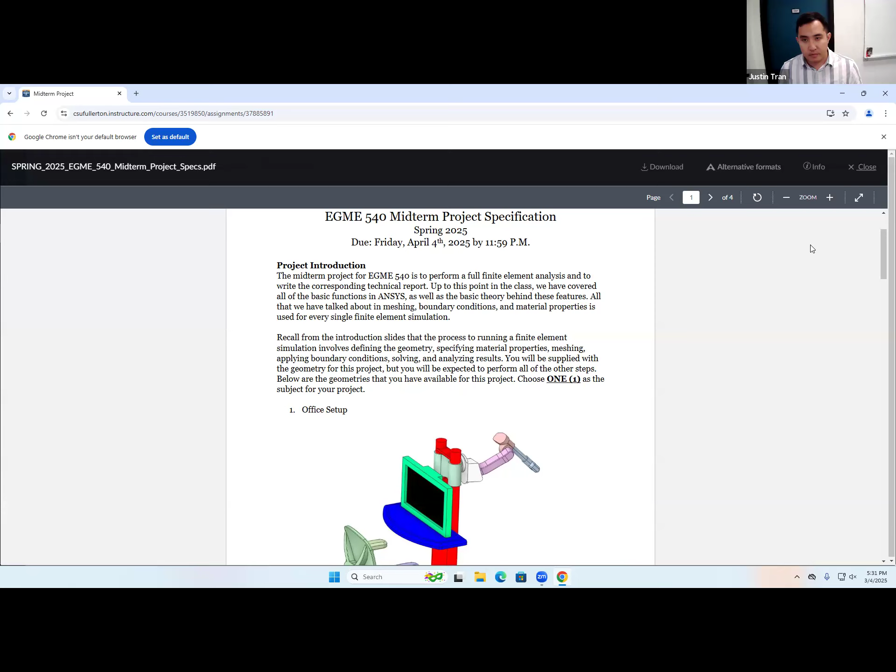So this document is posted on Canvas for you to look at. If you go to the Canvas site, under assignments, there should be a new assignment activated now called midterm project, and we can start to take a look at it. So there are several documents here that I posted for you: there's the project specifications, there's the rubric, which is how I'm going to score the midterm project, and then there's also a template for the project report, as well as the CAD files.

Okay, so basically the idea with the midterm project is that you're going to be doing a full finite element analysis on a given part. You're going to do all the steps, basically everything except getting the geometry yourself. That means loading the geometry in, choosing material properties, meshing, boundary conditions, running the simulation, showing the results, writing it up—basically everything we've been doing for the activities, except now I'm not going to be holding your hand throughout the whole process. You're going to be doing it all yourself, okay?

Now, I've designed this project in a way that emulates the expectations in a professional or research setting, in terms of running your own simulations, how you're supposed to set it up, how you're supposed to display the results, how you're supposed to talk about it in the report. This is your first real FEA assignment project that you do.

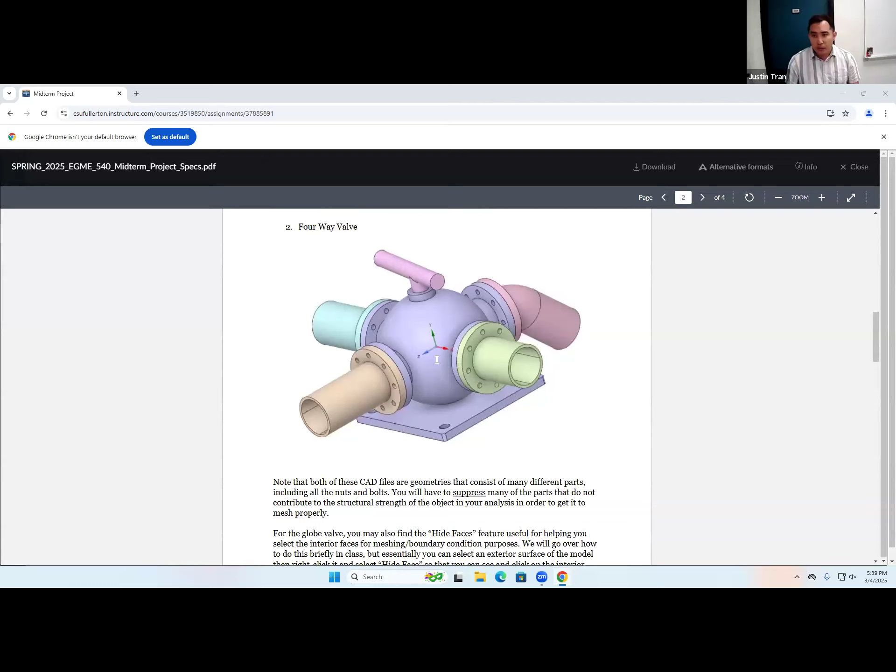One thing I want you guys to think of for your project is your own objective, so you'll have to use your imagination a little bit. Imagine how a valve like this is going to be used in practice. What are some typical loads that would be applied onto it? Think of some objectives you want to accomplish with your finite element simulation.

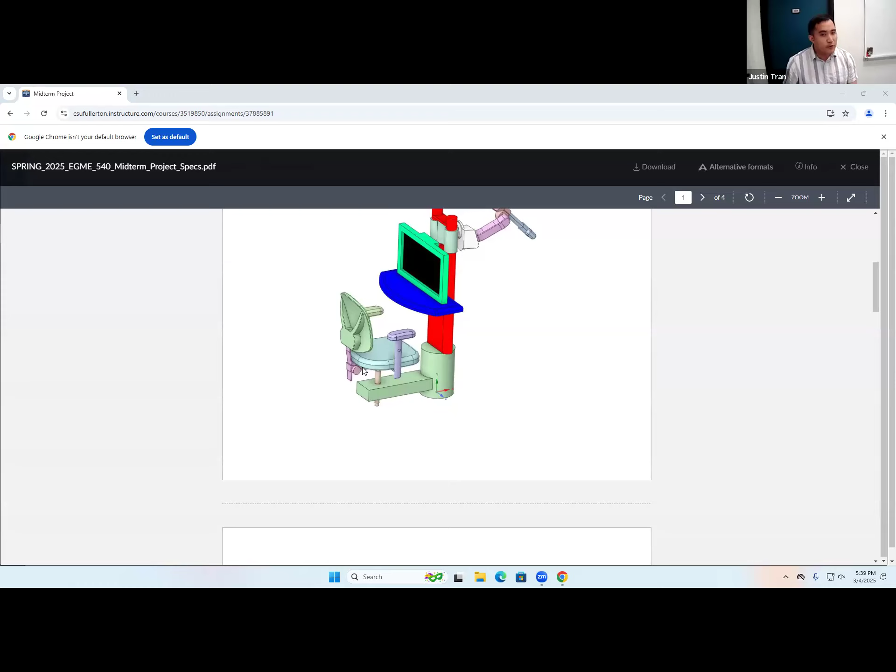Some examples: maybe you're interested in the mechanical stress in a critical area of the geometry. Let's take the home office chair, for example. Say you want to test a situation where someone jumps up and down on this chair. That supporting beam here, which is supporting the weight, is going to be under a lot of stress. So one objective in your simulation could be to find out if your setup is going to survive that kind of force.

Okay, maybe you're checking for failure - that's almost always an objective for these structural simulations. Maybe you're interested in the maximum deformation for some reason, or maybe minimizing the cost of production. Be creative with this, don't just have a simple 'we're testing to see if it's failing.' One example my undergrads thought of last semester was interesting.

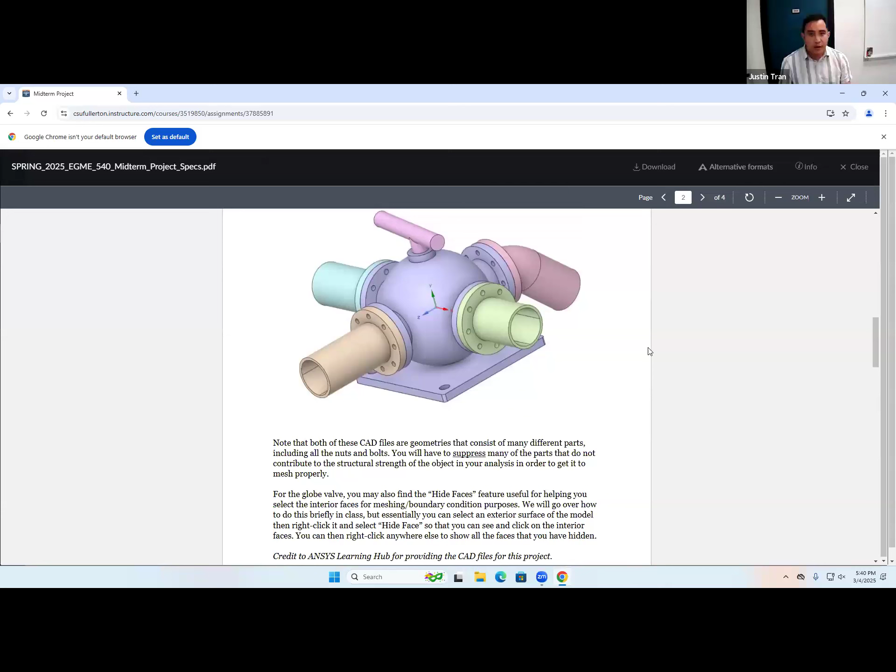So your objective, think of it as if you were to come up with a backstory, or a hypothesis or reason to run the simulation; that's essentially what we're looking for in the objective. Now, I will say that for this project, compared to a typical case, for a typical case you don't have to come up with an objective. The objective is just whatever you're trying to accomplish with the simulation. So for this one, you kind of have to use your imagination and make something up.

But it's a good practice to think about what you are looking for specifically in this finite element simulation. Because the thing with FEA is that there's a wealth of data, a wealth of information that you can obtain from any given simulation. And depending on what your objective is, that's going to tell you exactly what aspects of the data you want to highlight, and that's going to drive the rest of your analysis, the rest of your story. So spend some time, think of a good objective, and that's going to drive everything in your project. All right. Any questions on that?

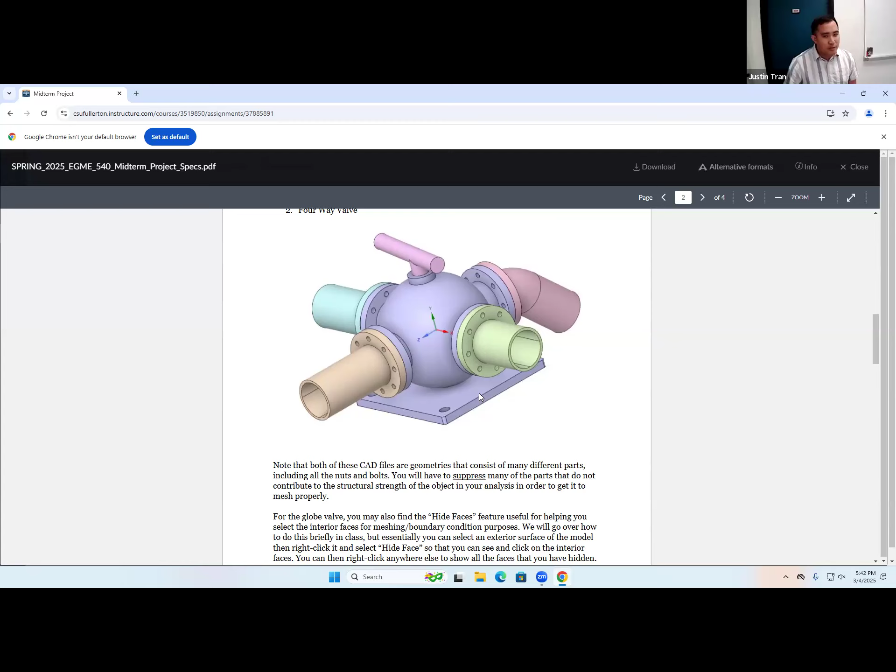But the geometry for the valve might be a little bit easier to modify just because there are fewer dimensions here. This office setup might be a little bit harder unless you're just changing the width of this, or the diameter of this post right here. But yeah, absolutely, you can change the geometry or the dimensions, and that can be part of your objectives. All right, any other questions on the project objective? Okay. So that's the first big section of the report.

The next big section is going to be what I call the finite element modeling methodology. By methodology, I mean things like your choice of materials, your choice of meshing settings, how many elements are in your mesh, your choice of boundary conditions, and how that relates to your objective. So basically everything that we've been discussing up until this point in the semester, I want to make sure that you're choosing appropriate settings for everything so your results are accurate.

The way I always have my students think about this is that whenever you run a finite element simulation and report on it, you have to imagine that whoever's reading your report or listening to your presentation is going to be really critical of all the decisions you make. They're going to ask: why did you choose that element order? Why did you choose that element shape? Did you run a mesh convergence test? Why did you choose the boundary condition this way? So every single decision you make in the finite element process, you should be able to justify in your report and your presentation of the results.

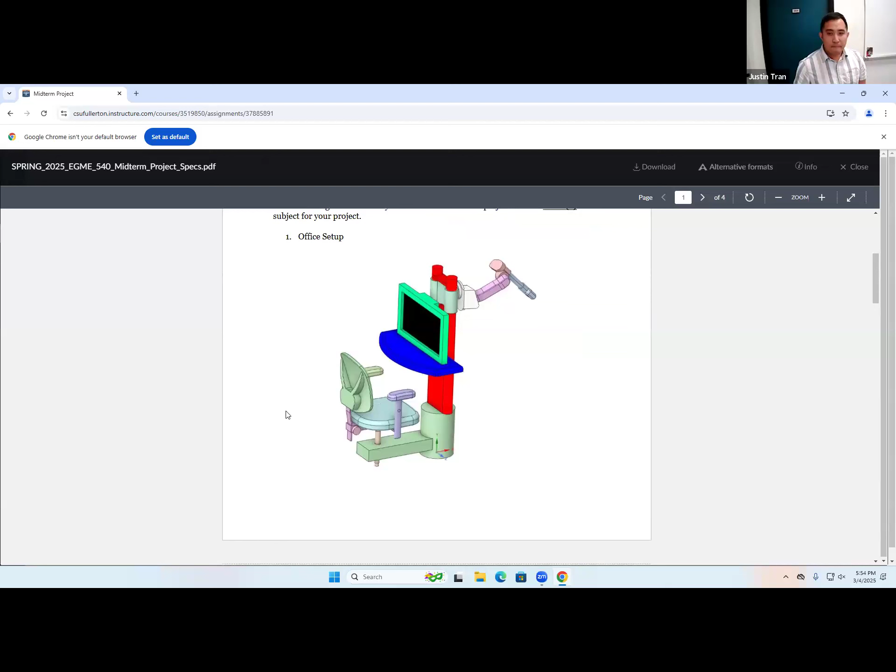Yeah. Can you go to that office chair? Oh, can you go to that office? Yeah. That arm thing? Yeah, so this arm thing, I found this geometry online, honestly. This arm thing here could be something that attaches to maybe a bigger system. That might be where they run the cables in for the system. It could also be used just to hang something on the back end there, in case this is a workstation for a medical hospital. And so they may hang some other equipment on there as well.

I can imagine that being the case, but you can also use your imagination in terms of what that extra hook there is for. You can also just suppress it. So if you can't think of a good application for it, you can just suppress it and then focus on the other parts of it. All right, any other questions? Yeah. Can we have more than 3 loading conditions? Of course, yeah, you can have more than 3. I'll grade your 3 best, but you can definitely have more than 3.

And can we use any unit system, like SI or whatever? Oh yeah. Any unit system, any material. I know I said you can be creative with the loading. You can be creative with the material properties as well, but it should be somewhat believable. So don't use like vibranium or something. Any other questions?

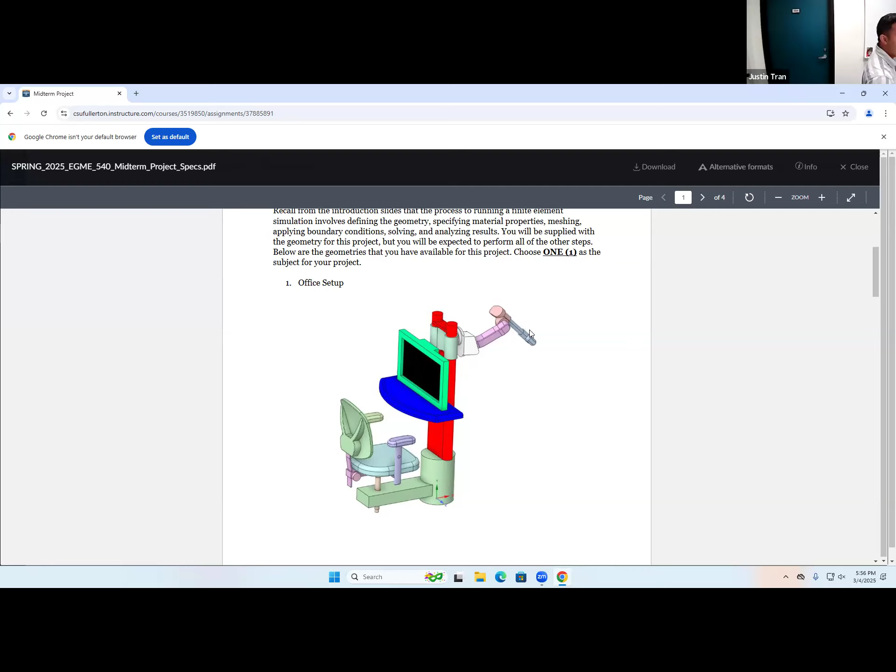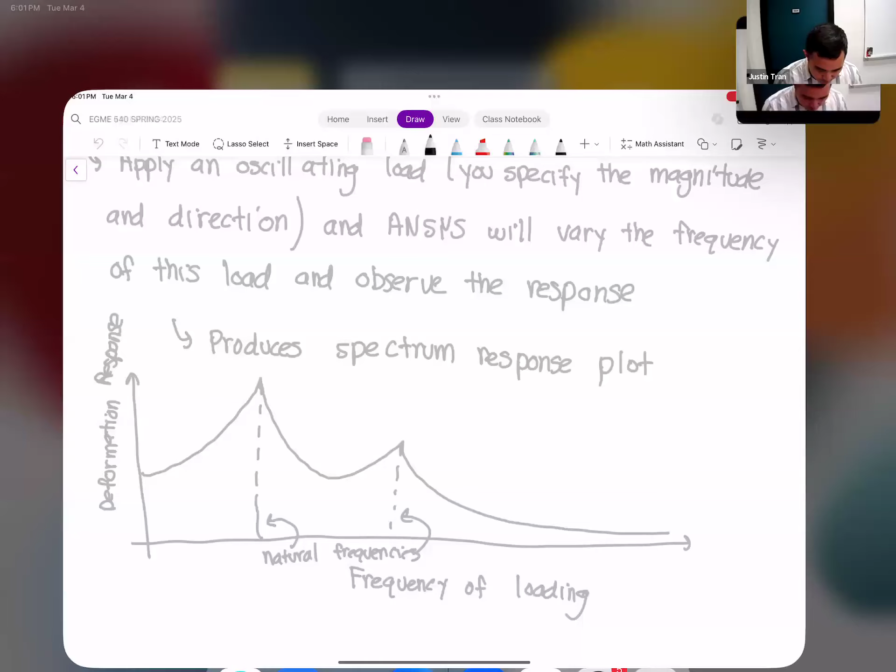Okay. So let's go ahead and continue our discussion from last Thursday. So last Thursday we were talking about shell and beam. Okay. So shell and beam elements, just like we discussed last Thursday, these are special element types that you can use in finite element simulation.

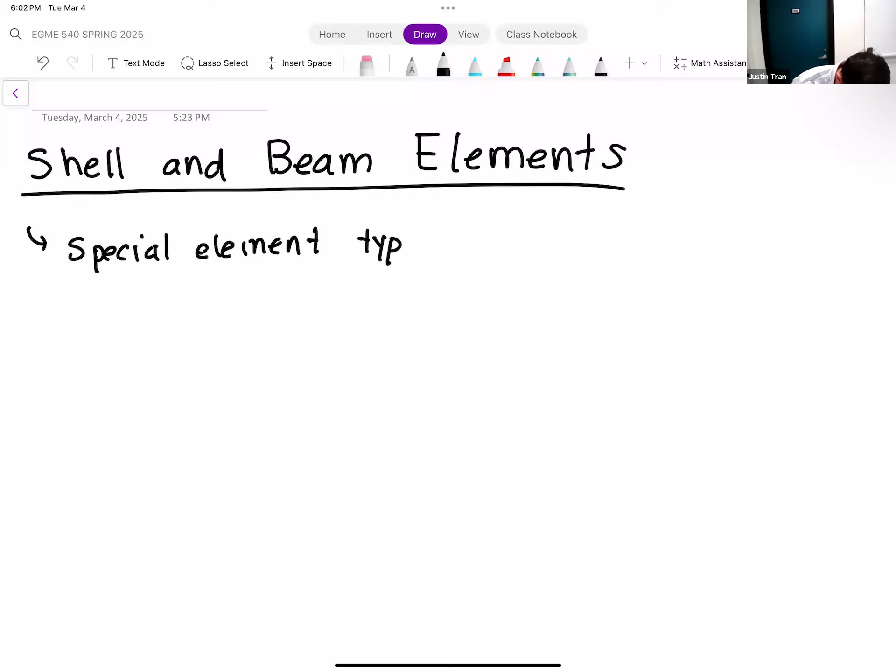And so what's unique about these element types is that even though you're going to use them in a three-dimensional application, a three-dimensional scenario, these elements themselves are actually lower dimension. Okay. So shell elements are specialized 2D elements. And beam elements, these are specialized one-dimensional elements.

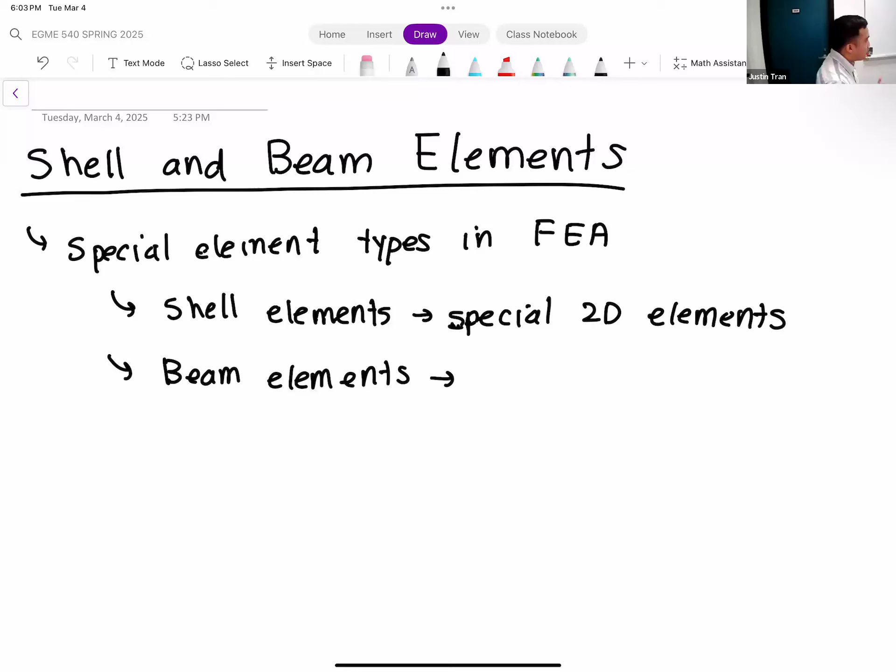And so again, these are special element types that are used in FEA, specifically three-dimensional FEA. Okay? And the situation where you want to use these element types is when you have geometries that are normally very challenging to mesh with solid elements.

And so by solid elements, I mean our traditional tetrahedrons, hexahedrons, the elements we've been using in our activities so far. Okay, so what do those situations look like? So what are situations which are difficult to mesh with the solid elements?

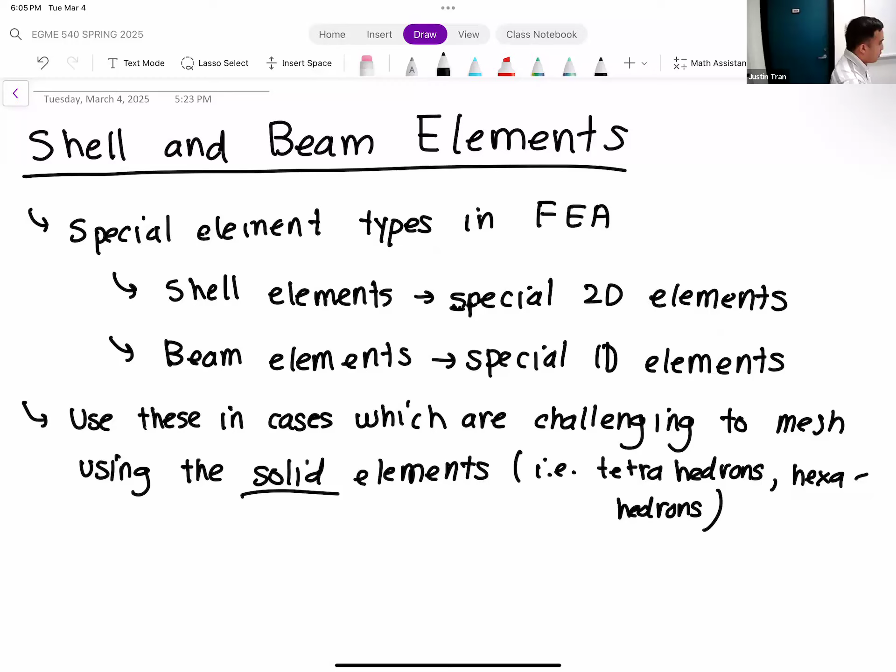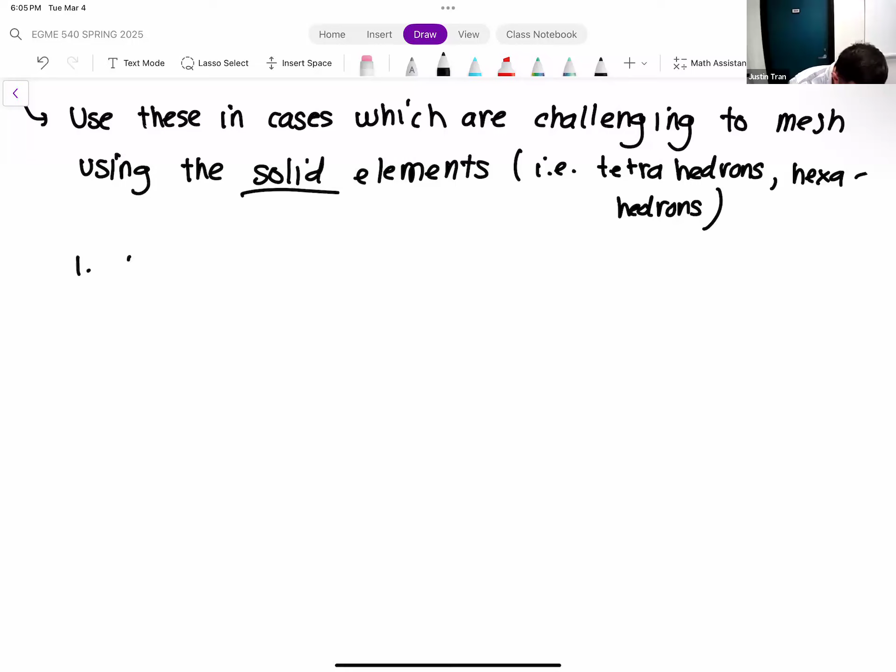So there are two categories of geometries that are in this regime here. Okay? The first one is what I call thin geometries. So these are geometries where one spatial dimension, or one geometric dimension of your part, is much, much smaller than all of the others.

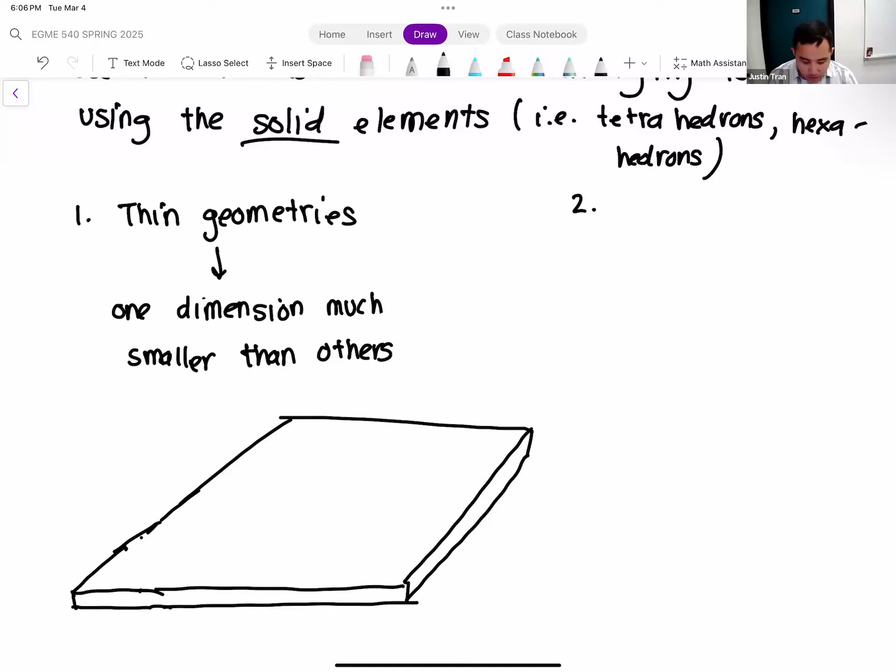The quintessential example that we have here is a thin plate. So for a thin plate, we can see that one of our dimensions, the thickness of the plate, is much, much smaller than the other ones, okay? The other type of geometry where this falls into place, for the most part, are slender geometries. And so slender geometries are situations where one dimension is actually much, much bigger than all the others.

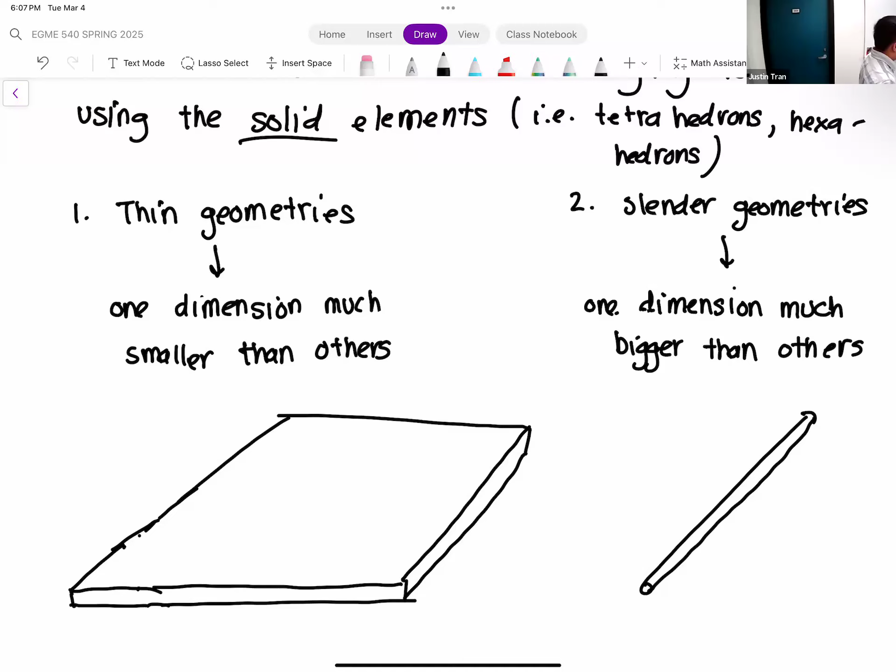Basically, whenever you have a geometry where you have dimensions that are not fully balanced, that's usually a case for when you want to use shells or beams, right? And the main reason for this is that if you were to try to mesh this with solid elements, there's a general rule of thumb that we like to use in FEA, which I call the multiple elements through the thickness rule.

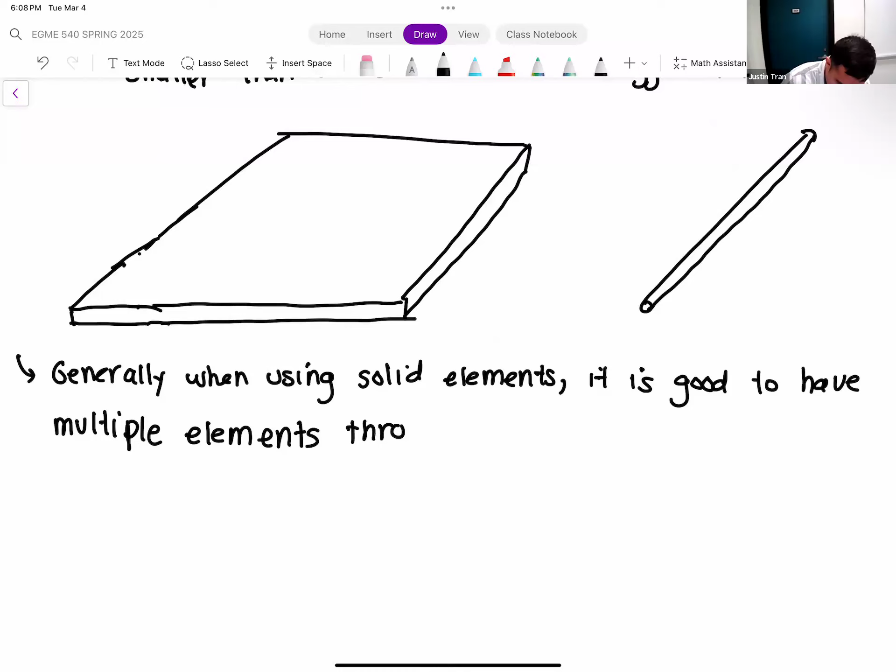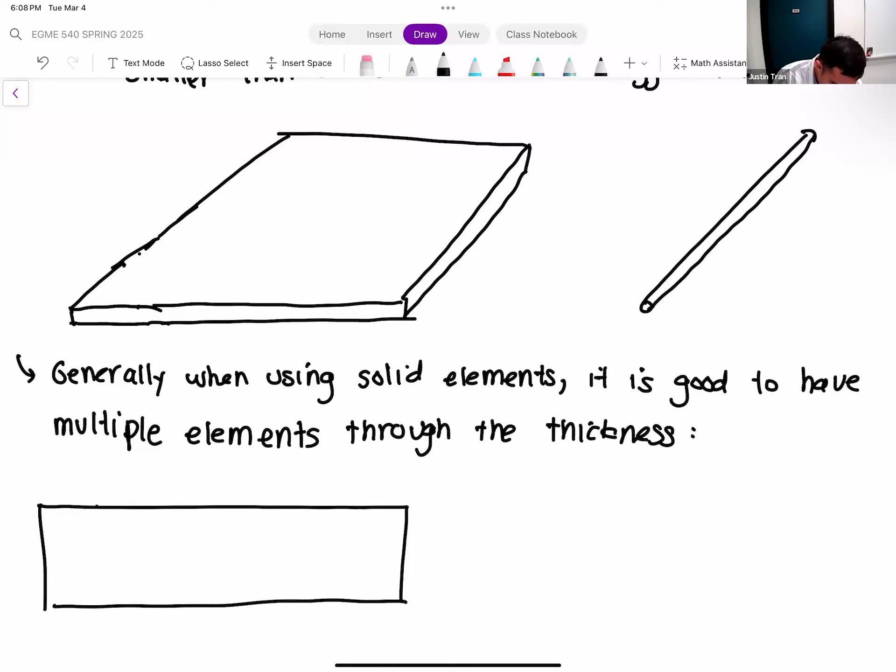And so you never want to have a situation in your mesh where your mesh is just one layer of elements deep. Okay. And so if you were to have a mesh that looks like this, maybe you have mesh elements that look like this, this would be kind of a no-no, right? In this case, your elements are only one layer deep. So generally, if you are going to use tetrahedrons or hexahedrons, you want to make sure that you have multiple layers of the elements.

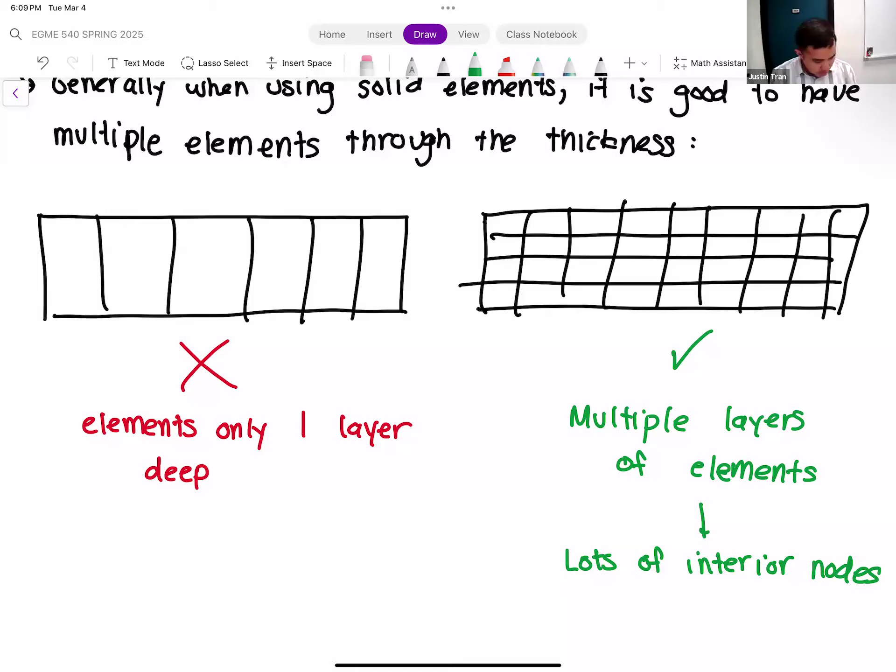And remember, the reason that we want to do this is because anytime you run a finite element simulation, you want a healthy number of interior nodes. And so if you only have one layer of elements, then all of your nodes are exterior, which may not be the worst thing. But this does make it so that when you compute certain quantities like the stresses or any derivative-based quantities, it is going to be a lot more inaccurate.

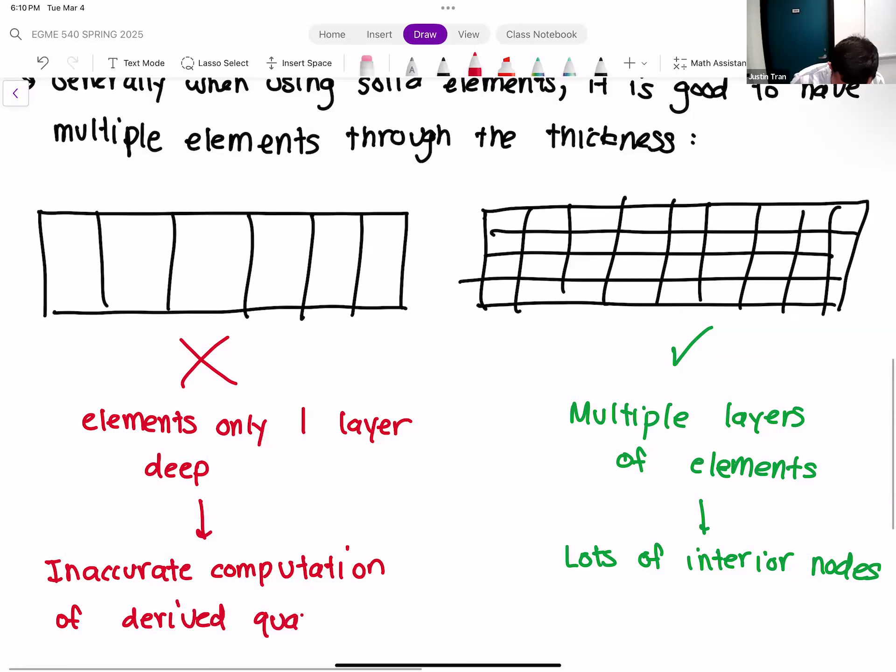All right, so the way to get around this situation: if you have a geometry that's sufficiently thin or very slender, sometimes it's very difficult to get the situation on the right, because to get it you may have to reduce the size of the elements very significantly, and you end up with a mesh with way too many elements for how complex the geometry is. Okay. So while you ideally want to achieve what's on the right, sometimes practically that's not possible if you have a very thin geometry.

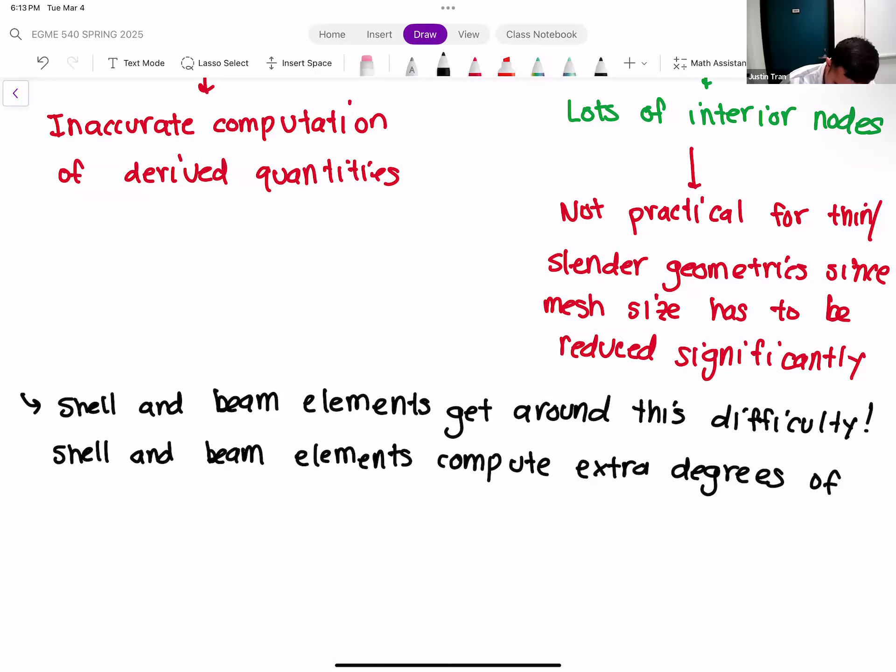So what we talked about last time is that what's special about shell and beam elements is that they compute extra degrees of freedom at their nodes relative to the solid elements. And those extra degrees of freedom, most notably the rotation of the nodes or the change in orientation, help to compute these derived quantities much more accurately without the need for the interior nodes. Okay.

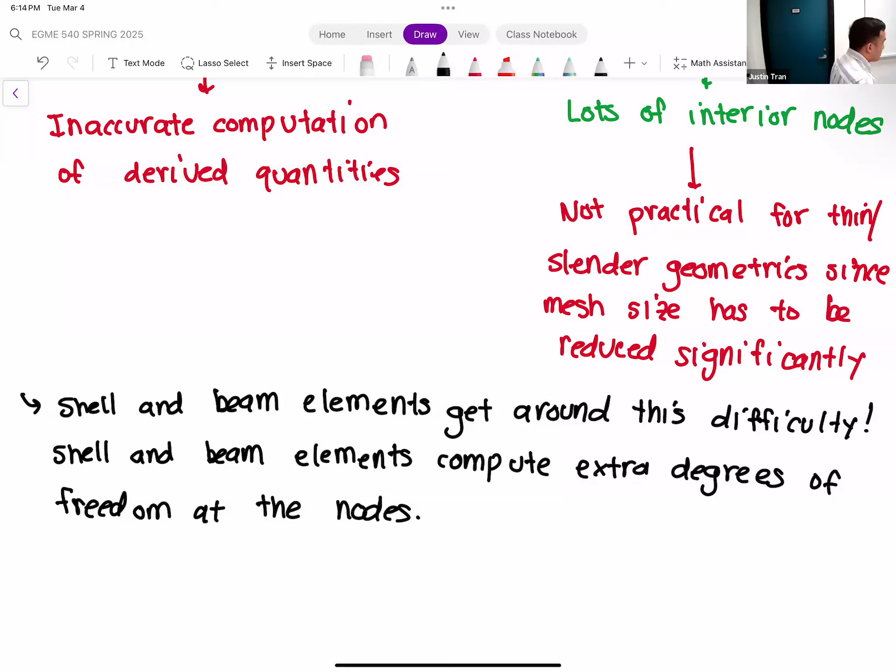Okay. So all that sounds good. That's everything that we talked about last time. Any questions on any of this? Okay, good. All right, so then the question is, when should you use shell and beam elements? All this sounds great, so why don't we just always use shell and beam elements? Well, there are some limitations on this as well.

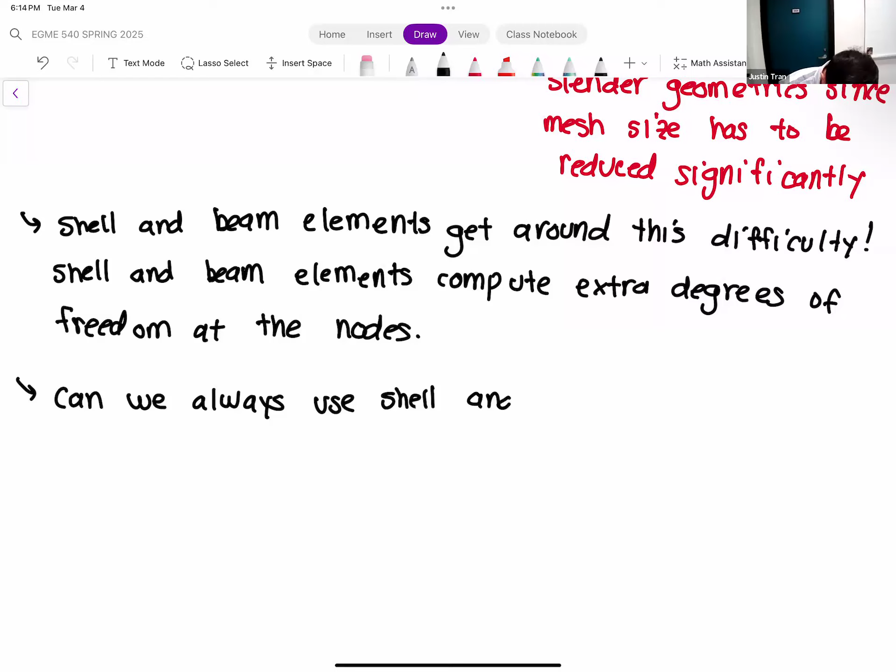The question is, can we always use these things? Intuitively, you would think no, because you're using a two-dimensional element. You should only use it for geometries that look two-dimensional. Same thing for beams: you should only use it for geometries that look like they're one-dimensional. So there are actually some significant limitations in how we can apply this.

Okay, so let's talk about shell elements first. The first limitation for shell elements is that, throughout your entire section of the geometry which you're turning into a shell, the assumption is that the thickness is uniform throughout that entire piece of geometry.

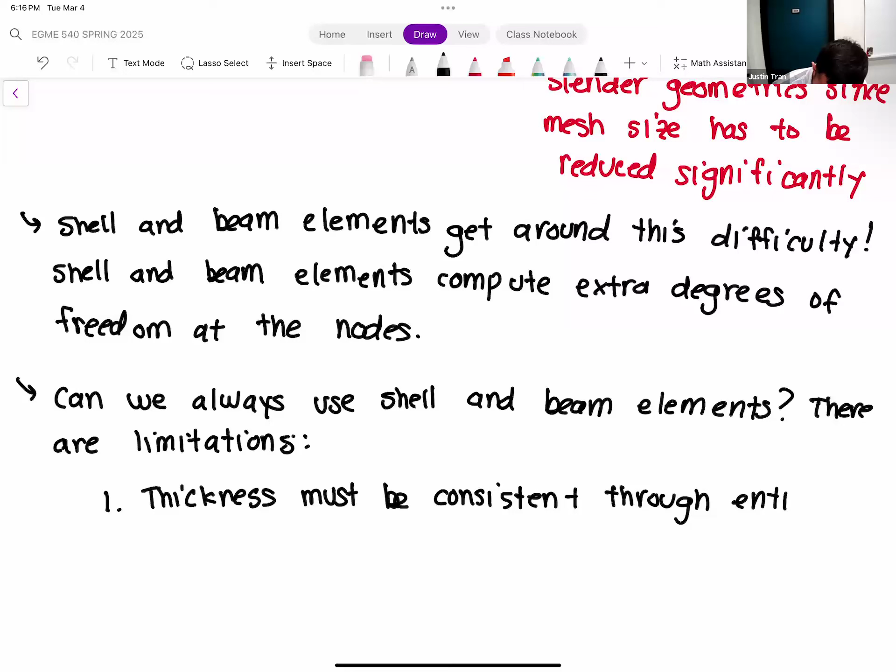And that's actually more difficult to obtain than you think, because anytime you have a filleted region in your geometry, where you have a curved section, where the thickness is going to vary, that actually makes it difficult to run shell elements. Now the shelling tool within ANSYS is a little bit intelligent. If it is just a simple curve with a simple fillet, it should be able to figure that out and turn it into a shell.

But I will say right now, for your midterm projects, for both options, it's going to be very difficult to obtain shells. The only one where I think you might be able to use a shell is the valve. But even that one, there are weird sections where the pipes meet, which are not uniform thicknesses. So you might have a difficult time creating a shell in those geometries. So generally for shells, we only use them when the thickness is consistent, which is very difficult for complex geometries where thickness changes pretty dynamically.

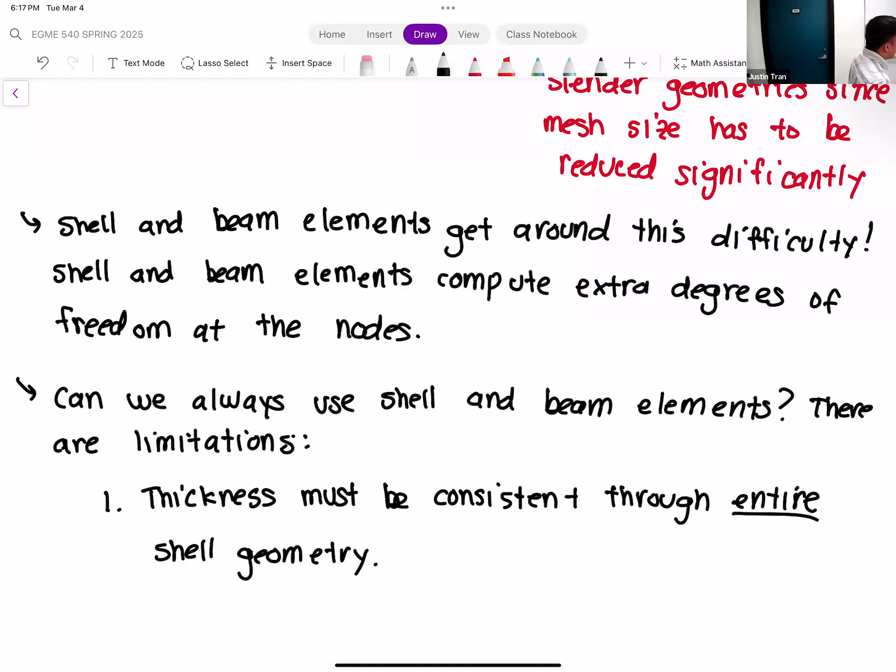And same thing for beams too. When you construct a beam element, the beam has to remember information about its cross-sectional shape. So same as with the shells, when you extract a beam, the cross section has to be uniform throughout the entire beam.

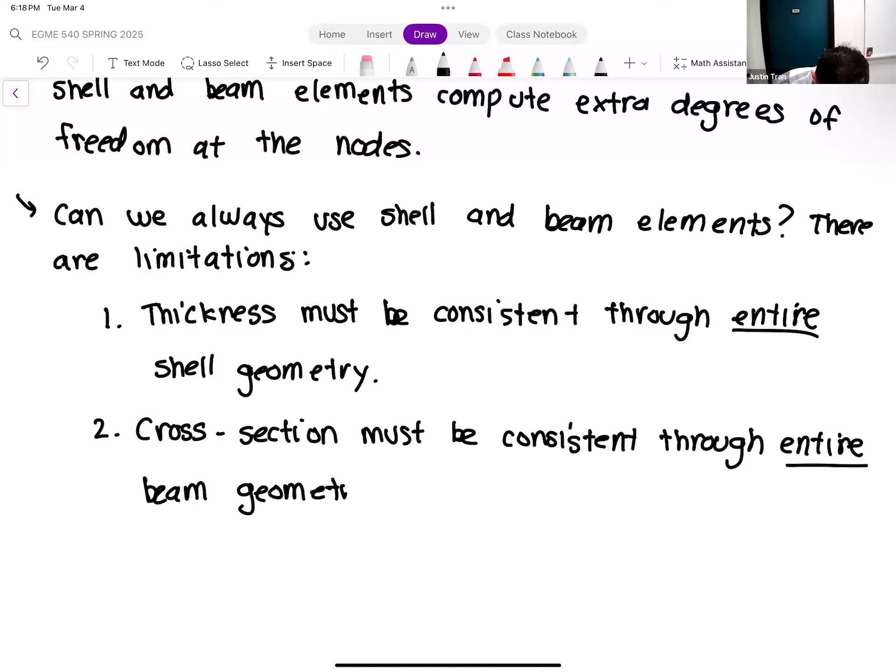Now, there are exceptions to this. If you have a beam with just a very simple taper, where the cross-sectional area is reducing linearly down the length of the beam, you might be able to create a beam out of that one. That's not too bad. But if you have a geometry where the cross-section is changing rapidly or it's changing shape, then you most likely are not going to be able to create a beam.

All right, number 3. Number 3 is not really a hard rule, but it's my own personal rule of thumb: there must be a sufficient amount of dimension mismatch in order for you to use a beam or shell. The threshold that I typically use is that there should be a 10x difference in the dimensions in order to apply a shell or a beam. Yes.

What I mean by this is that the thickness should be at least 10 times smaller than your other dimensions in order to apply a shell, or the length of your beam should be at least 10 times longer than the other dimensions of the cross section in order to apply a beam. That's my rule of thumb, just because 10 is an easy number to remember. But there are situations where a 9x, 8x or 7x difference might be enough to justify, granted the thickness or the cross section remains constant, but you should be in that ballpark.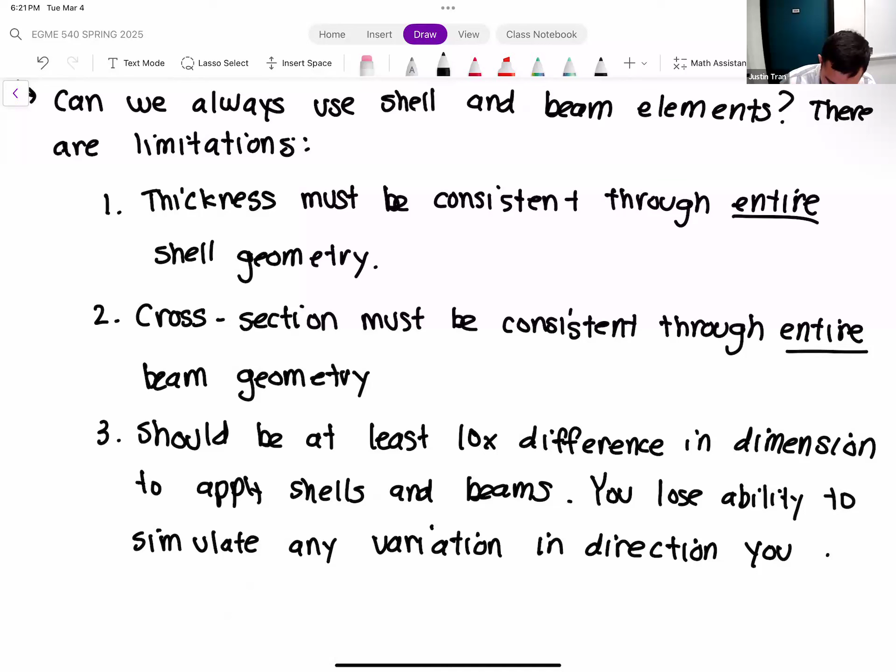So that means you can no longer solve for any variation of stress through the thickness of a shell element. You can no longer compute differences in the deformation across the cross section of a beam. You're literally taking these geometries and removing a dimension, turning it into a shell or a beam. So if that variation is important, you want to make sure that you retain that. You don't turn it into a shell or a beam.

Once you start getting used to these, you'll have the intuition to make a judgment call. If you're not sure, honestly, I would say just use the solid elements. That's generally the safer option. You should only use shells and beams in situations where it's fairly obvious.

Okay, any questions on this?

All right, so that's kind of the theory behind shells and beams in terms of how they work. Let's talk about the practical side of how we actually start to apply these in our FEA.

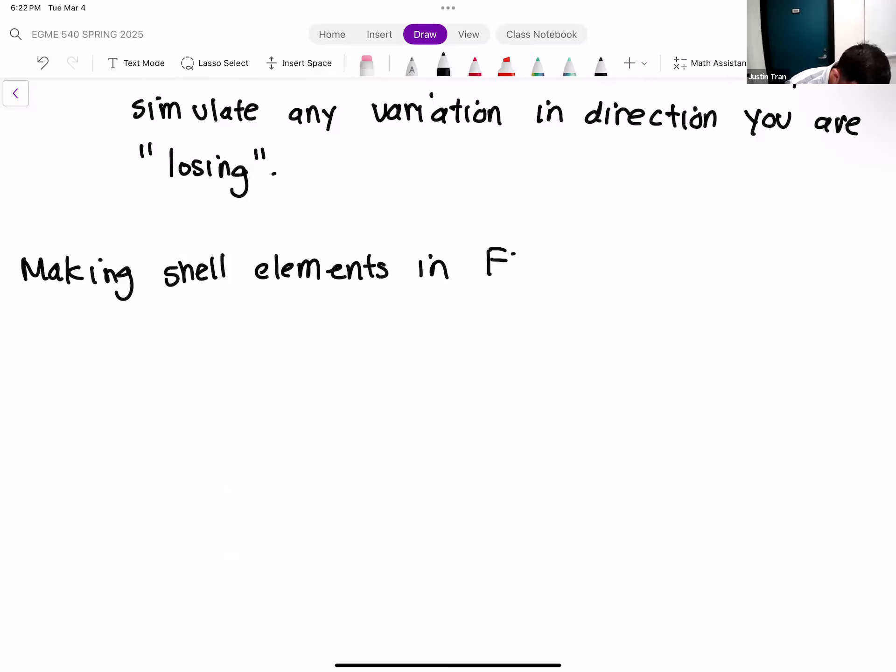So in other words, how are we even going to do this in the activity on Thursday? There's kind of two schools of thought, or two main methods to creating shells and beams within FEA.

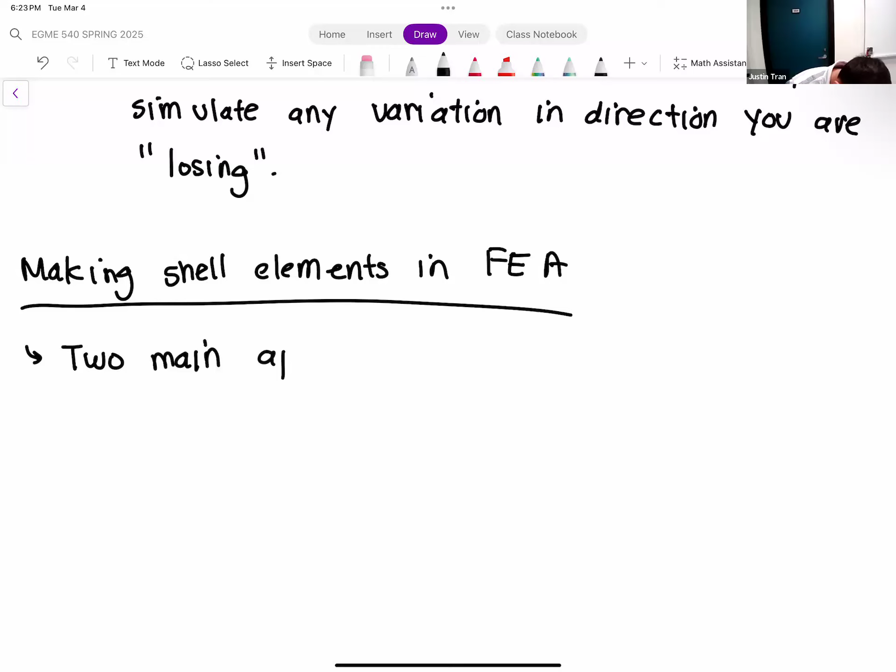The same can be true of the beams as well, although the specifics of the approaches are kind of different. The first approach is generally the more reliable one, the one that gives you the most accurate results, which is to design your geometry from the ground up using shells and using beams.

There are tools and techniques you can use in the CAD software, and you're not just limited to ANSYS, so you can definitely use these in SolidWorks as well, where you create a two-dimensional structure. Either you extrude a sketch, an open-ended sketch, so it doesn't form a complete solid, or maybe you create just a 2D sketch yourself and then assign that as a two-dimensional surface. If you can design your CAD model from the ground up to have these thin geometries, that's a great way to do it.

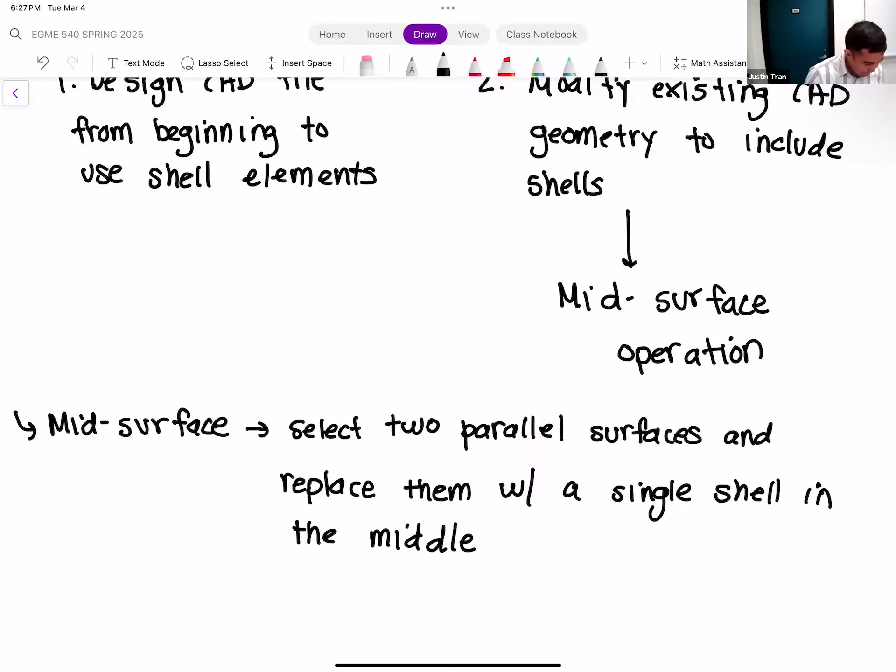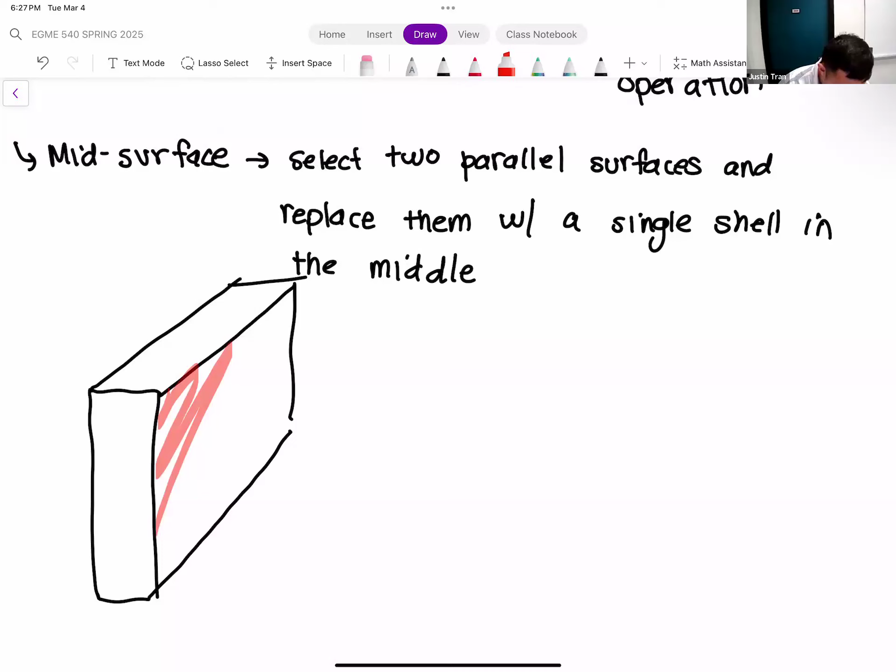So it looks something like this. Let's say that we have a geometry in our CAD file, relatively thin geometry here. I'll draw it vertical just for a change of pace. And so what we have here is that if you look at one of these surfaces—this surface here that's highlighted in red—

What you're going to do in the software is label this as surface number 1. Then on the back side, which you can't really see because of my drawing skills, or lack thereof, there is a second surface that is parallel to this first one, separated by that small distance. So surface 1 and surface 2.

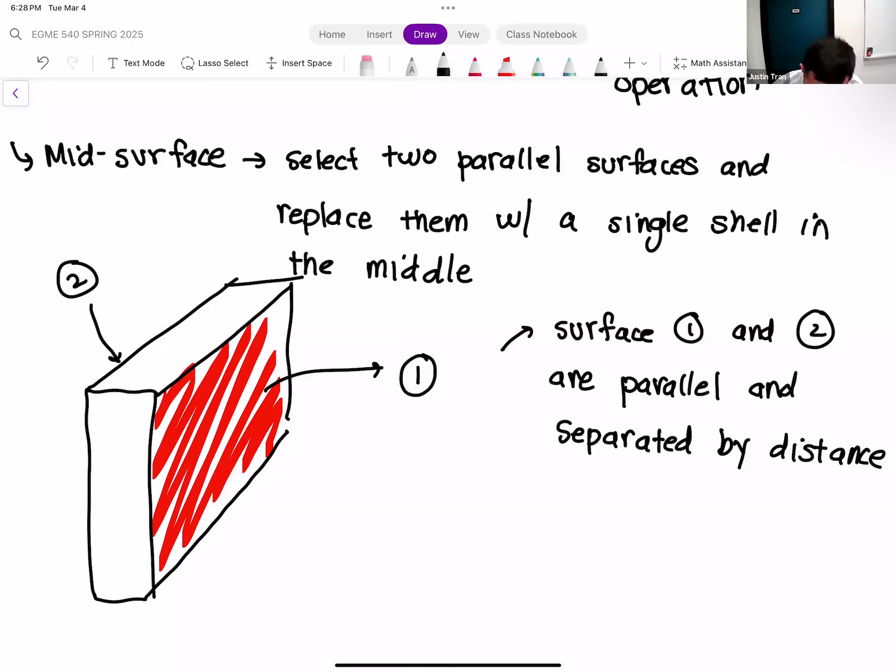Surface 1, surface 2—they're parallel and separated by a distance, we'll call it T for the thickness. So after selecting surface 1 and surface 2, and the program confirms that they are indeed parallel and separated by a constant distance T, what you can then do is apply mid-surface.

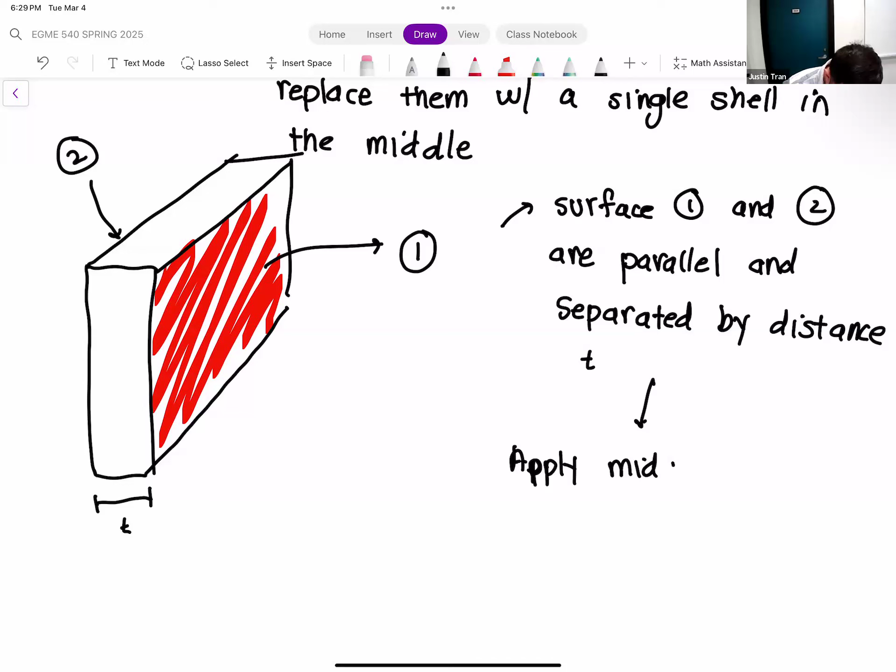And what that mid-surface is going to do is eliminate this 3-dimensional object and replace it with a 2-dimensional shell. So what that's going to look like is that it's going to basically create a surface right in the middle of these, hence the name mid-surface.

So I've gone ahead and drawn that purple line there. You have this new shell surface that forms right in the middle of these two. It's going to eliminate the thickness of the other ones, and then all you're going to be left with is just that shell element right in between the two.

All right, so that's a very common way to produce shell elements from an existing geometry. You're going to be using this a lot, especially because a lot of times when a CAD model was made, it was not really designed for FEA. So if you want to use shell elements or beam elements, you have to work with the existing CAD.

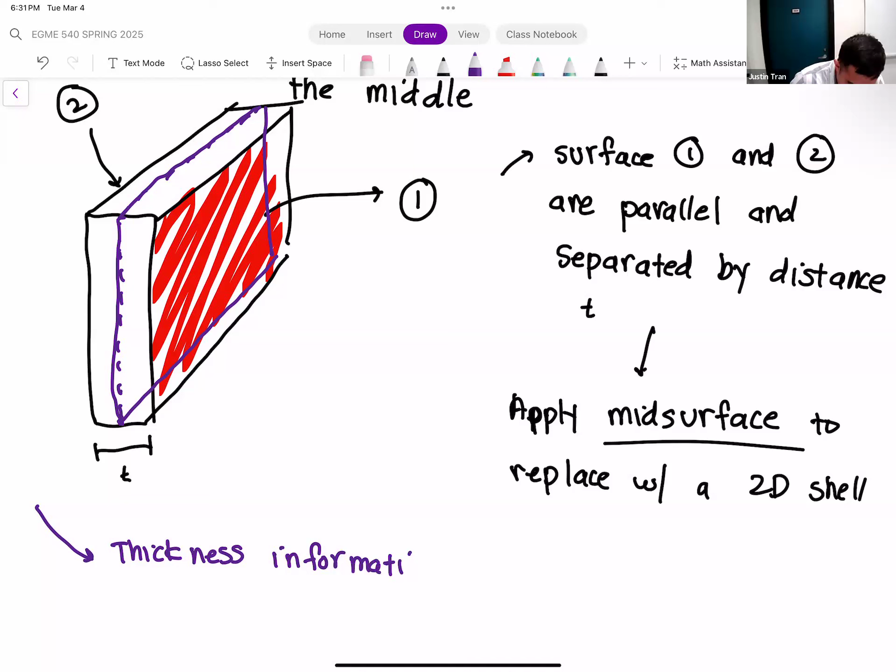Now, of course, this does mean that you're going to be losing the thickness information. Or I guess the better way to say it is that the thickness information isn't lost. It's no longer represented geometrically, but instead it's stored as a material property.

Okay, so we're going to be doing this a lot on Thursday. Any questions on mid-surfacing?

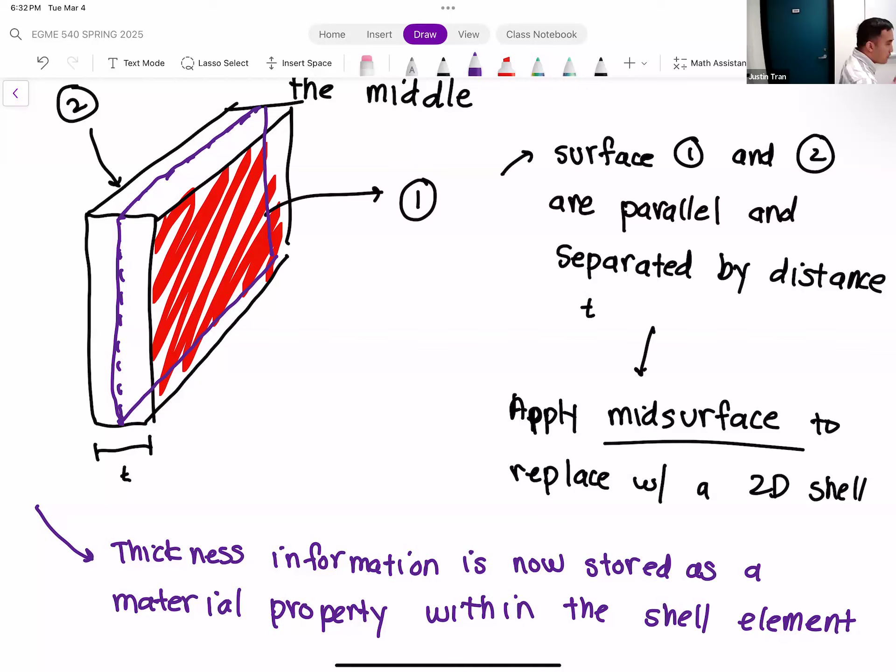One thing to keep in mind, and you're going to be dealing with this on Thursday as well, is that when you're using operations like mid-surfacing or beam extraction, you're going to be losing some geometric information. So what that basically means is that after you eliminate this geometric thickness, some parts of your assembly may not connect in the same way that they've done before.

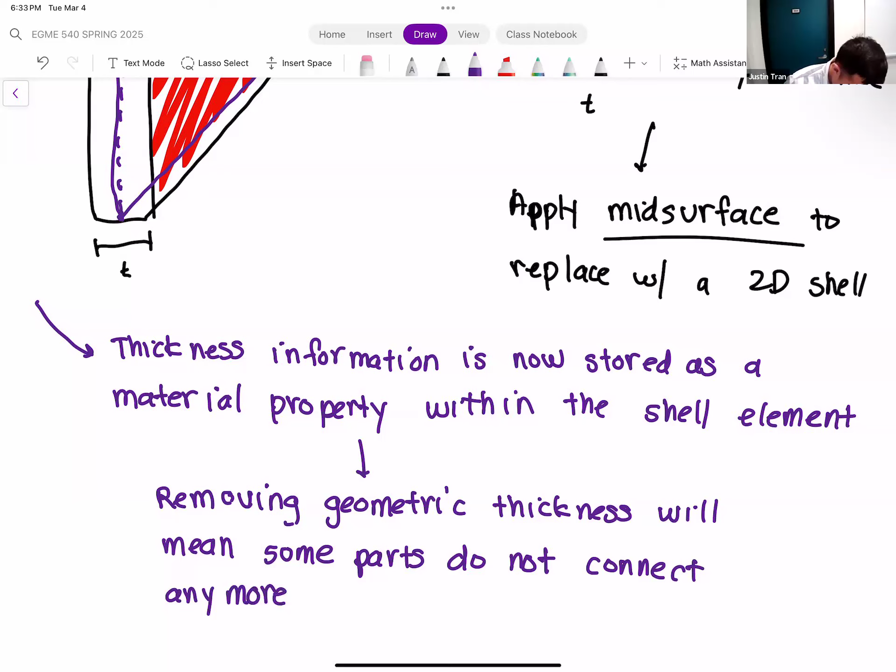And so to fix this, you're going to have to manually adjust your geometry.

So actually, the majority of the time on Thursday is going to be spent fixing the geometry. We're going to be creating shell and beam elements with the intent of making our finite element simulation better, but it's going to create some problems in other areas as well.

Okay, so that's shell elements. Let's just go over quickly how to get beams.

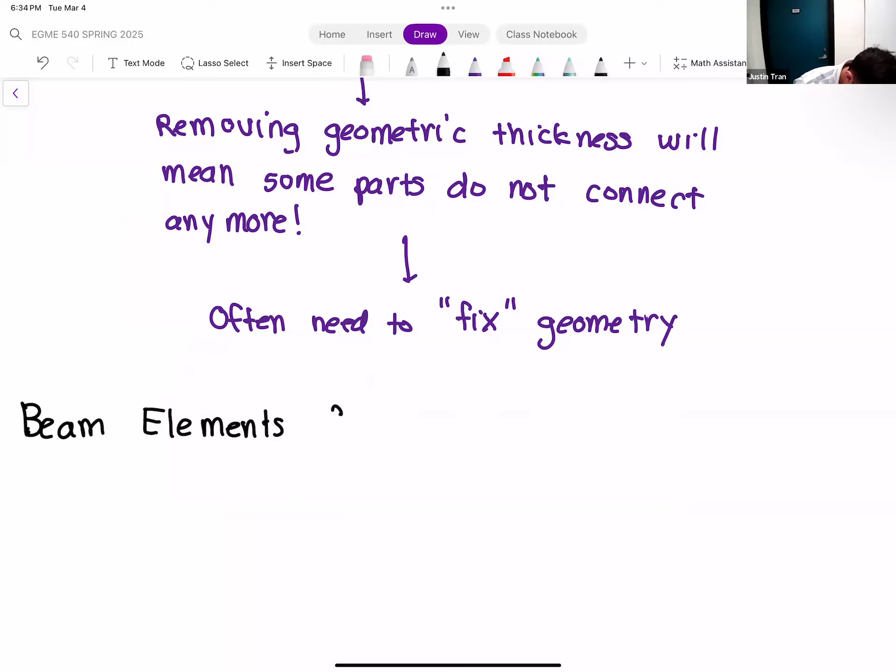So once again, with beam elements, there are two main approaches to getting a beam element for your FEA. The first approach is to design the CAD model from the start with beam elements in mind.

The other way to approach this is to take an existing CAD model and basically create beam elements from that.

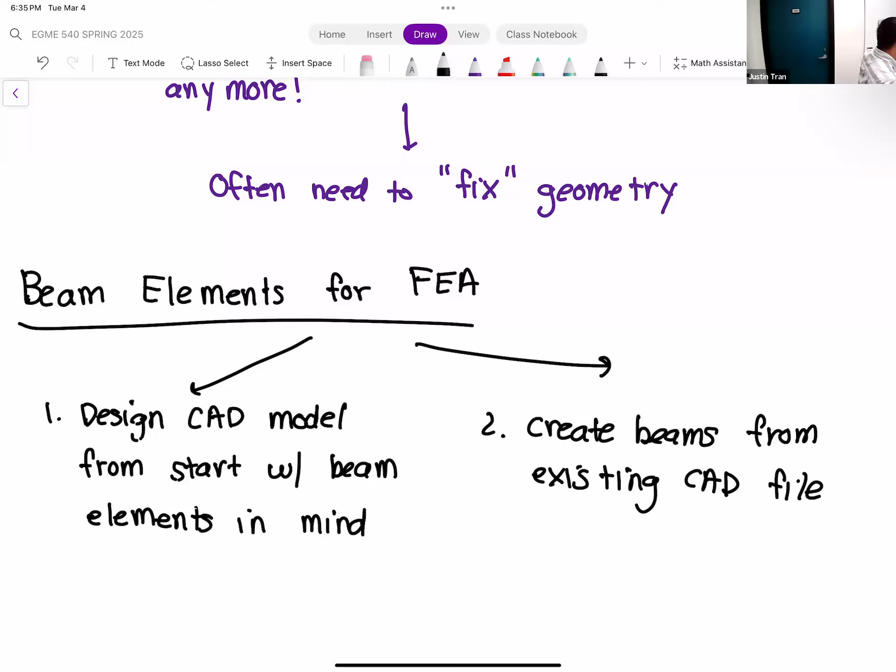Okay, so thankfully, the process of getting a beam element from an existing CAD model is a little bit more straightforward than mid-surfacing. And to do this, we're going to use a tool called beam extraction.

The way beam extraction works is that you're going to look at your geometry, see which portion or which parts of the geometry would be good as beam elements, and then you're going to activate the extraction tool and just click on the parts that are beams, and then voila, you have beams.

So beam extraction is very simple. I just call it point and click.

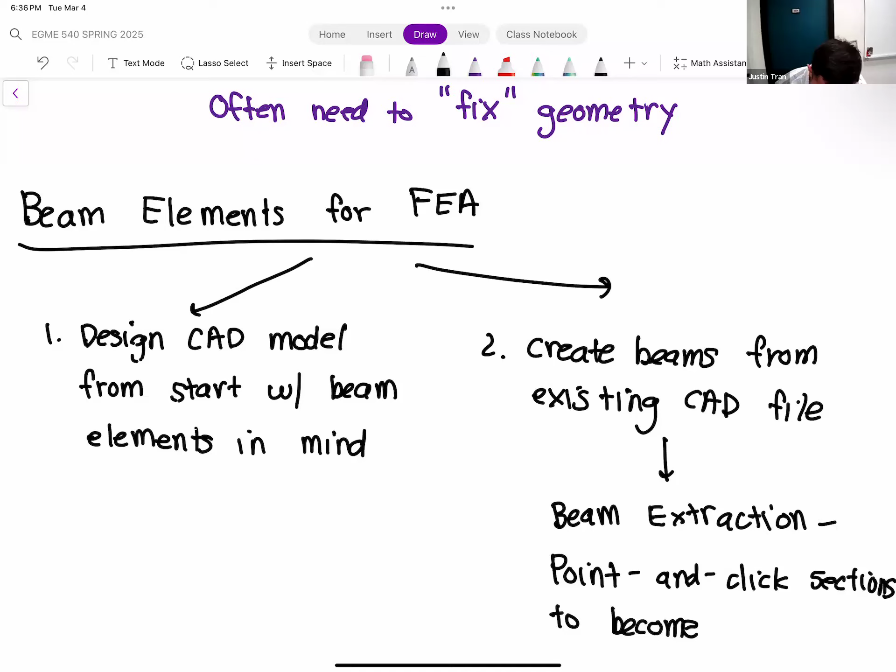So let's say that you have a part of your geometry that looks something like this. All you have to do is just click on this, do beam extraction, and then all of a sudden, now you have a beam. Very straightforward, very easy, probably the thing we're going to spend the least amount of time on.

So when you do the beam extraction tool, information about the cross-sectional shape of the beam is saved within the beam itself. Just like how shell elements store the thickness as a material property, beam elements also store information about their cross-section within the beam geometry itself. And that's not only the size of the cross-section, but also the cross-sectional shape.

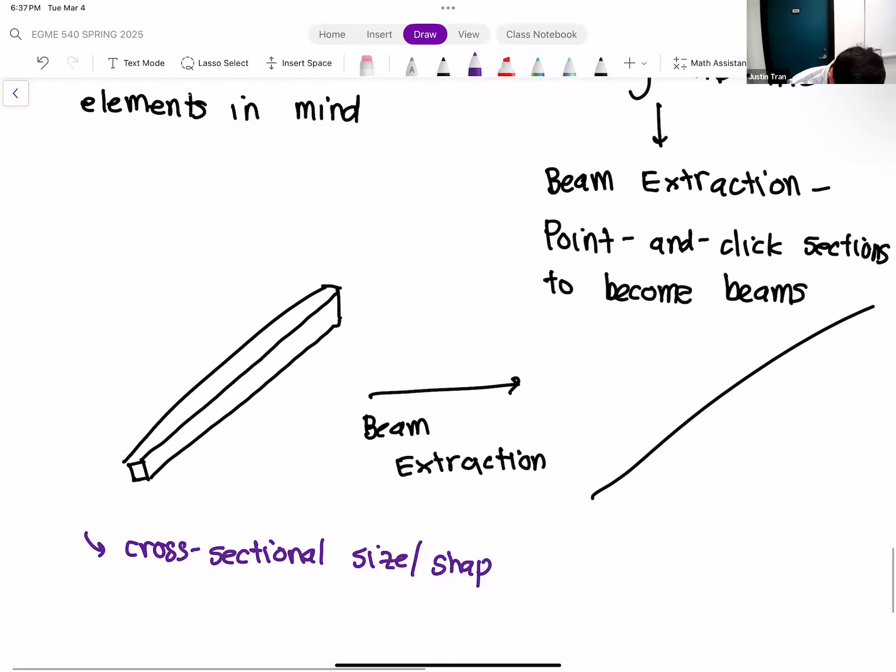All right, any questions on beam extraction, beam elements here? Okay, one last thing that I want to go over today, just to tie this all together with our discussion of elements, is this idea of using shell and beam elements and mesh convergence.

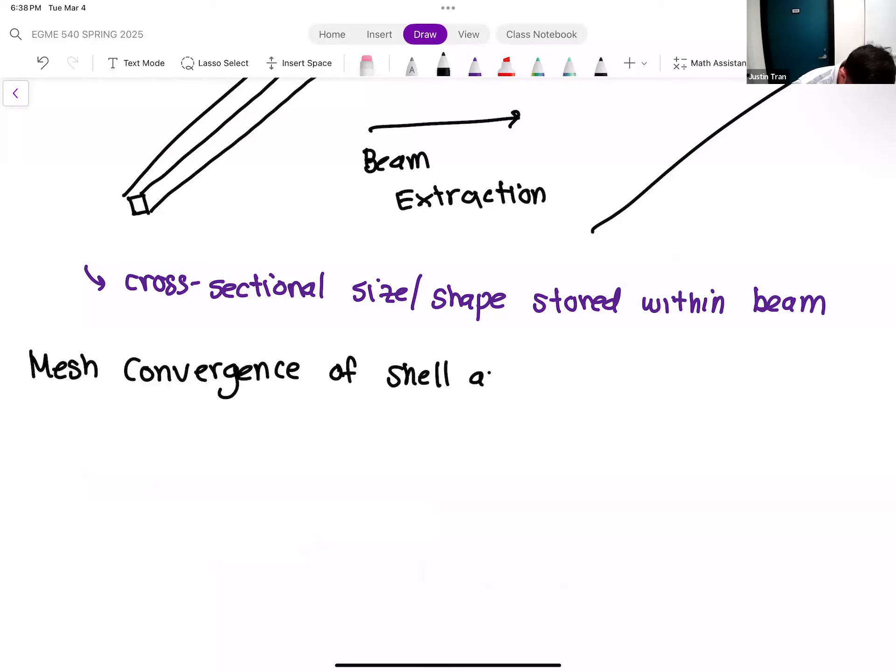All right, so if you remember from last week, we spent a good amount of time discussing this idea of a mesh convergence test, which basically shows you the convergence, or the change in a particular simulation output, relative to the number of elements in your mesh.

And so generally, one of the conclusions from that discussion was that if you use proper meshing techniques, you're going to reach convergence in your results with a fewer number of elements compared to improper techniques. What we can say is that it's generally desirable to reach mesh convergence with a fewer number of elements in your mesh rather than more.

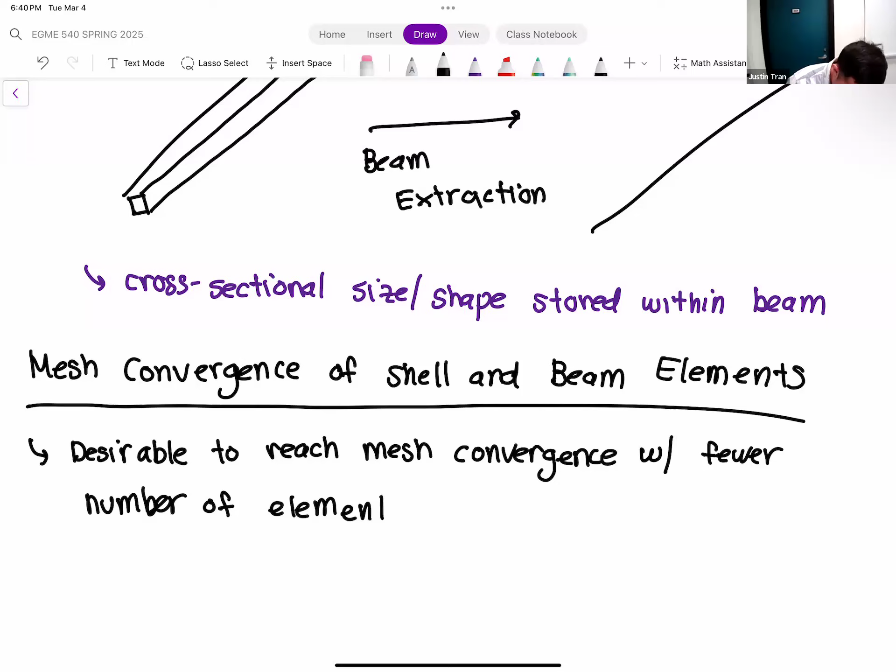All right, let me go ahead and draw a typical mesh convergence plot. So if you remember, our mesh convergence plot looks like the following. On the horizontal axis, we have the number of elements. And on the vertical axis, we have usually some kind of finite element result, whether it be stresses or deformations, max stress, max deformation, average deformation, whatever you think is most important from your simulation.

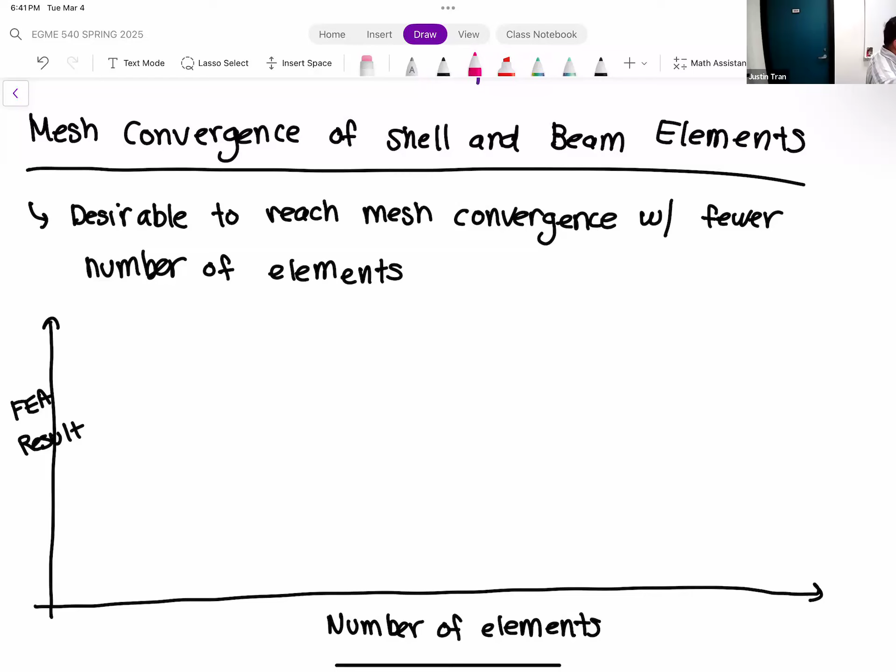So for a typical solid element mesh, let's say we're using hexahedrons and tetrahedrons to mesh a thin geometry, generally what you're going to see is that convergence is really slow, if not impossible. So this pink line here represents the convergence using solid elements in thin geometry.

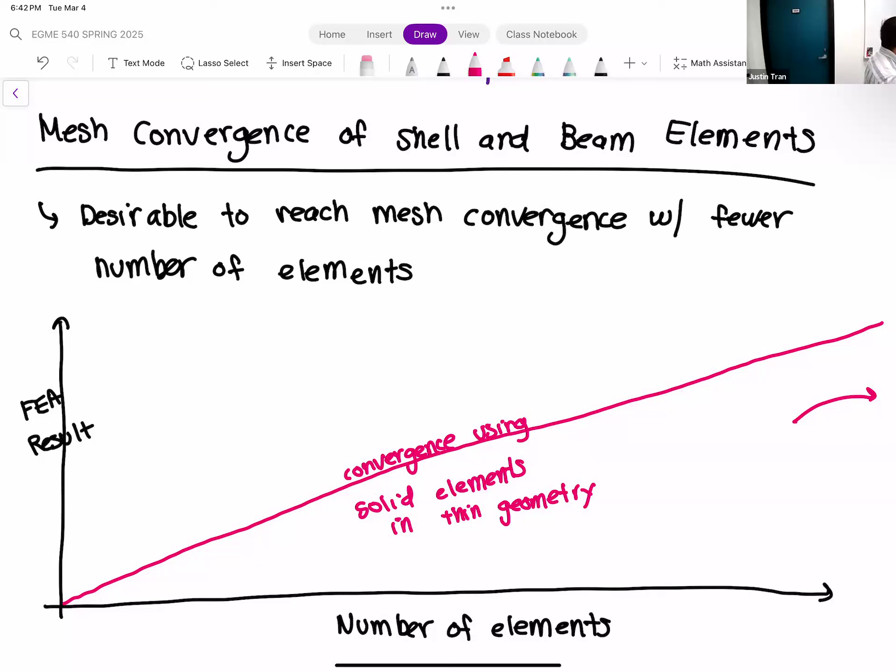One thing I'm going to have you do in the activity on Thursday is a mesh convergence test on the geometry, but using solid elements. It may not look clean like this, it's probably going to be a little messy. What you're going to see is that you probably are not going to reach convergence. If you look at this plot, it's not flatlining at all. What this plot is saying is that we need to go even further beyond the confines of this plot here in order to reach convergence.

And that's very common. Even for your projects, I suspect that for some of the geometries, most notably the valve, you may have trouble getting convergence. But for the project, it's okay, those geometries are a little more on the challenging side. But the idea is that if you were to use shell and beam elements in a situation where it's appropriate, you should be able to reach convergence much faster. If not, you're going to reach convergence in a situation where normally you may not.

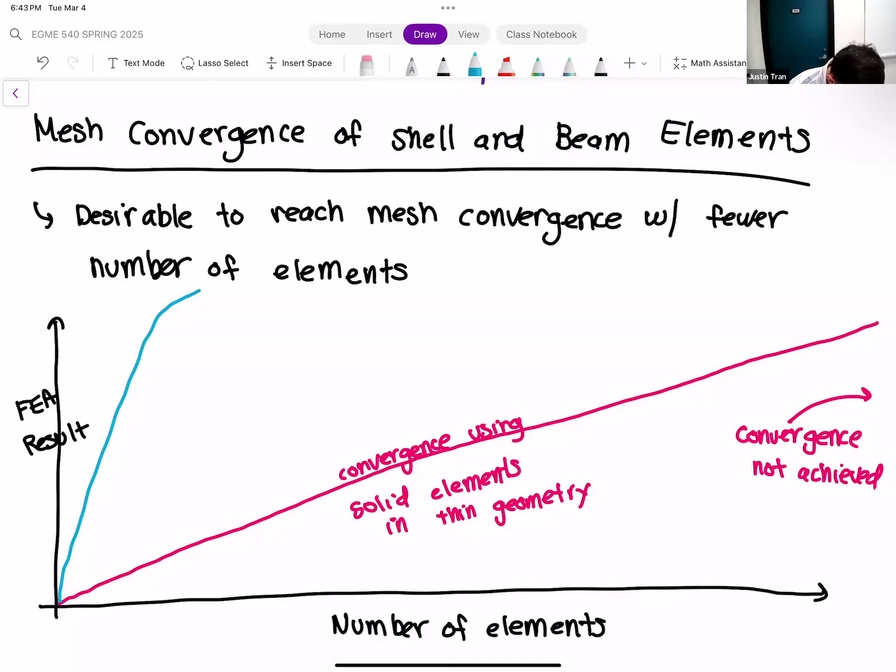So for shell and beam elements, you may have a graph that looks like this. This blue curve is for shell and beam elements. You can see from this plot that there's a very clear section where the results start to flatline, where they start to converge. So we can say that our mesh is converged at this point. Another way to say it is that our results have converged, so we have converged results. That's generally the expectation.

So for situations which are appropriate, which fit all the criteria for using shell and beam elements, you should be able to reach convergence much faster with much fewer elements than if you were to use pure solid elements. And this is kind of the main motivation of why we want to use shells and beams.

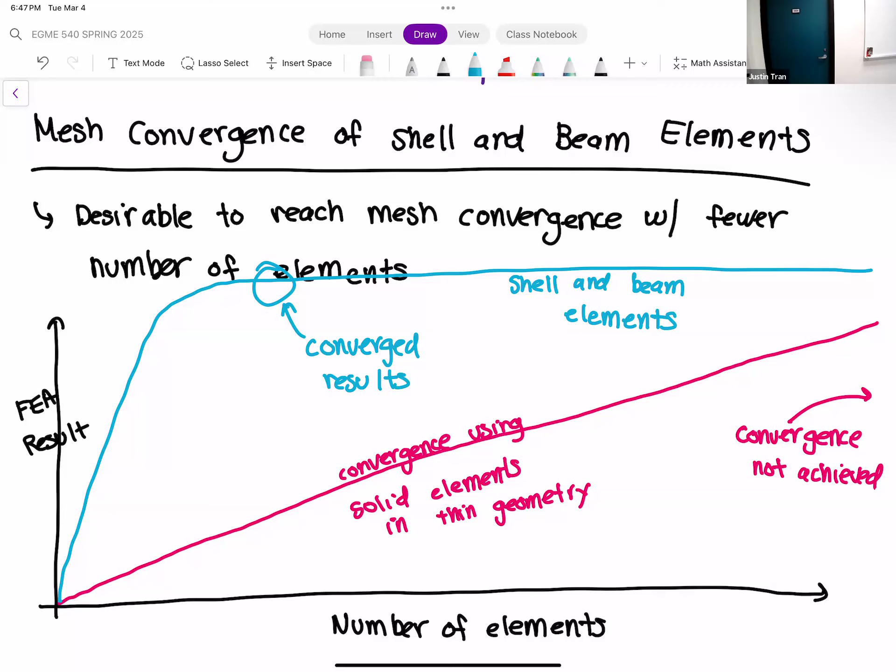Yep. All right, Dominic, ready? So.